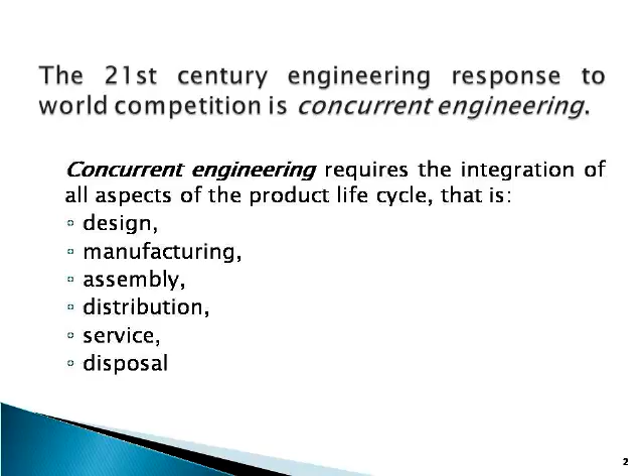The 21st century engineering we are entering in, its response to the world competition is concurrent engineering. Concurrent engineering requires the integration of all aspects of the product life cycle, that is design, manufacturing, assembly, distribution, service, disposal. Two important areas in the life cycle of a product are design and manufacturing. Process planning serves as an integration link between design and manufacturing.

Process planning consists of preparing a set of instructions that describe how to fabricate a part or build an assembly which will satisfy engineering design specifications. So let us now discuss the process planning in detail. It involves describing detailed instructions that one uses to fabricate a part to specifications.

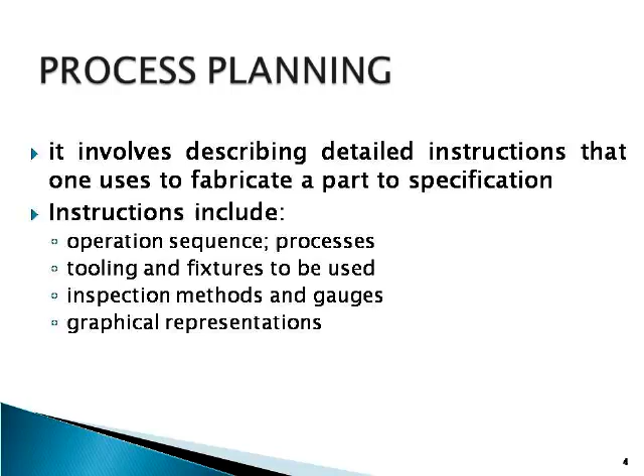The instructions include operation sequences or the processes, the tooling and fixtures to be used, inspection methods to be used, gauges to be used, and the graphical representations, etc. Process planning is an act of preparing a detailed processing documentation for the manufacture of a piece part or an assembly. It is a systematic determination of the methods by which a product is to be manufactured economically and competitively.

These are all various ways that we can discuss the process plan. But we often confuse two words. One is process planning, the other one is production planning. In fact, process planning is entirely different from production planning. I am going to give you those things here.

Process planning is concerned with the engineering and technology issues of how to make the product and its parts, what type of equipment and tooling are to be used to fabricate the parts and assemble the product. Whereas production planning is concerned with the logistics issues of making the product, that is ordering the material, ordering the tools, obtaining the resources required to make the product in sufficient quantities to satisfy demand. It may be noted that production is always done only after the process planning.

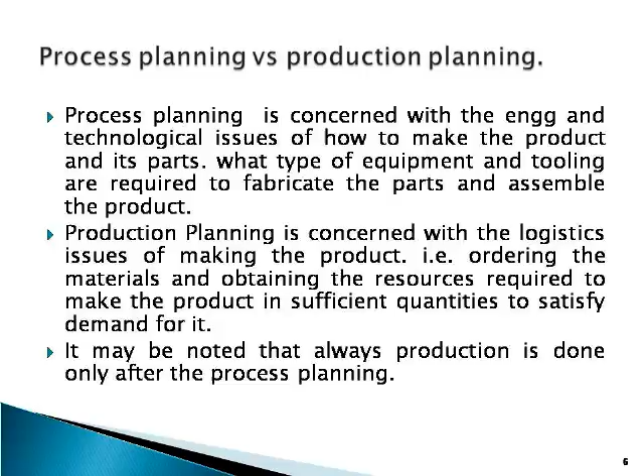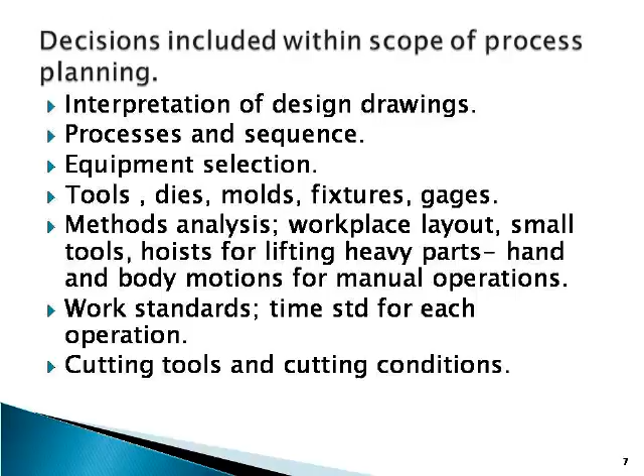There are certain decisions included in the scope of process planning, that is interpretation of design drawings, and the process planner should have the knowledge of processes and sequences, and should have the knowledge of equipment selection and take a decision regarding that. You should have the knowledge of tools, selection of tools, dies, molds, fixtures, gauges, and methods analysis, which includes workplace layout, small tools, hoists for lifting heavy parts, hand and body motions for manual operations, work standards that is time standards for each operation, cutting tools, machining conditions and cutting conditions, etc. You see in this slide, it is simply an operation sheet.

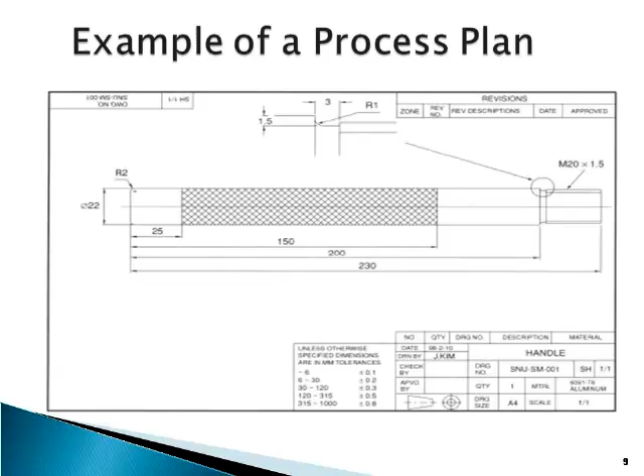So this is another typical process plan sheet being used. This is more or less a standard one, but the format could be different with different manufacturers. These are the typical process plans being used in industry. I'm just showing them for our reference and better understanding.

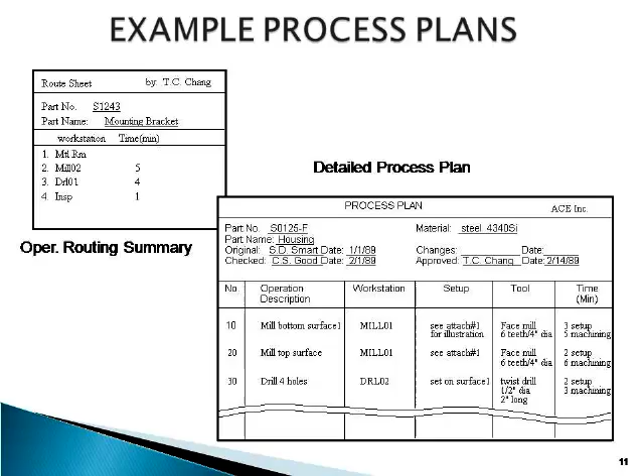If the process planner's productivity is significantly improved - because process planning is an act which is based completely upon the process planner's view, expertise and knowledge - if process planning is done by one process planner, it could be different from another process planner, and his time is very, very important. If he could save his time, he would be able to spare the remaining time on various other aspects in order to improve the productivity.

He can spend more time on methods improvements and cost reduction activities. Routings can be consistently optimized. Manufacturing instructions can be provided in greater detail. Pre-production lead times can be reduced. Responsiveness to engineering changes can be increased.

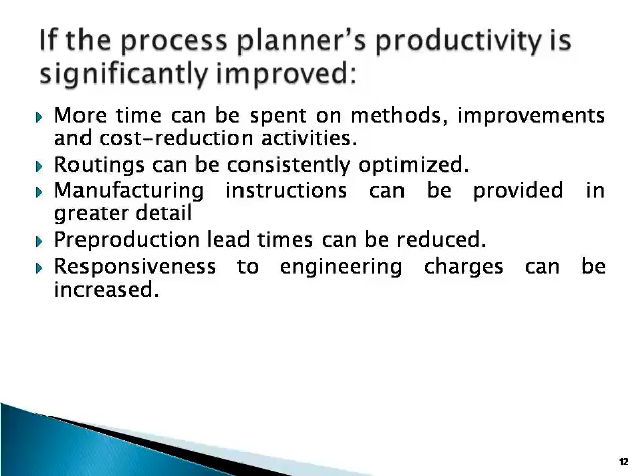And the development of process plans involves a number of activities. First is part print analysis, which is called analysis of part requirements. Selection of the raw work part, that means the basic shape and size of the workpieces. Determining manufacturing options and their sequences. Selection of machine tools, selection of tools, work holding devices, and inspection equipment. Determining machining conditions and manufacturing time.

What is this analysis of part requirements? The part requirements can be defined as part features, process that includes the process determination steps of processes, dimensions - it will take decisions regarding the selection of machine tool size - tolerance specifications, the capability of machine tools can be selected based upon tolerance specifications, and CNC code generation, etc.

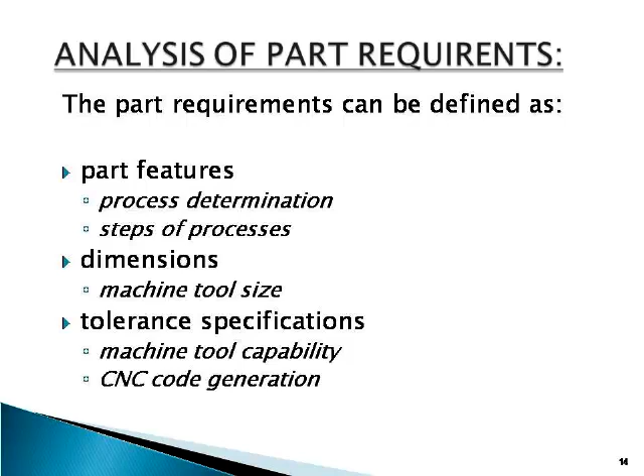And selection of raw workpiece - it involves such attributes as basic shape of the workpiece. You can have standard materials, whether it is a rod, a slab, a blank or a profile, and the dimensions. Sometimes pre-shaped materials - cast parts, forged parts, extruded parts, like that. Size of the workpiece, basic raw material, and size of the machine tool on which this workpiece is capable of being held, and material conditions, tool selections, and other things.

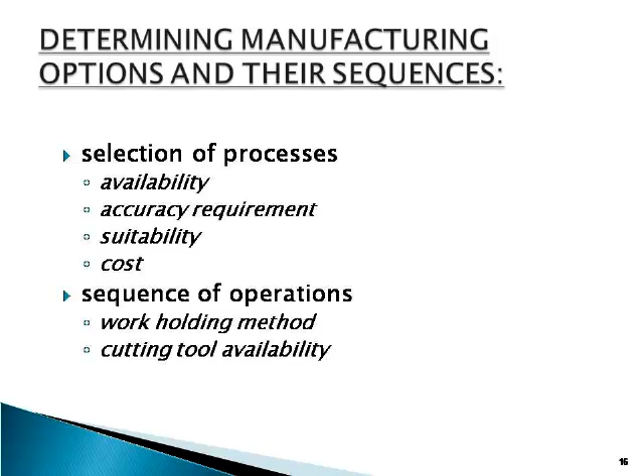Determining manufacturing options and their sequences - selection of the processes based on availability, accuracy requirement, suitability, and cost. Sequence of operations - there are several operations. What operation is to be done first? What operation is to be done next? Work holding methods - how best you can hold the work so that maximum number of processes can be done on the given workpiece without changing the setup.

Cutting tools availability, cost of the cutting tools - you can do the operation with the least cost tools, or you can do the operations with more costlier tools also. So all these things depend upon how the process planner selects it, and a very important thing is selection of machine tools.

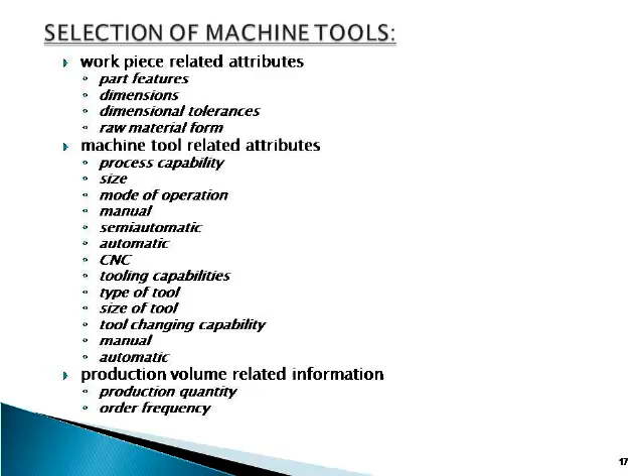For example, reaming cannot be done without drilling, so first a drill must be selected to drill a hole, and then a reamer to ream the hole. If tapping is to be done in the drilled hole, it can only be done after the reaming operation. Drilling, reaming and tapping must be done sequentially. You cannot do the reaming operation first and then drilling next. So this selection of sequence of steps is a process plan.

You take similarly the turning operation. There are several operations that can be done on lathe machines: simple turning, orthogonal cutting, tapering, profile turning, grooving, facing, face grooving, form cutting, boring, drilling, and several others like parting, threading, knurling. All these operations can be done on lathe machines. So you have to select the machine, select the process, and select the tool also for that operation.

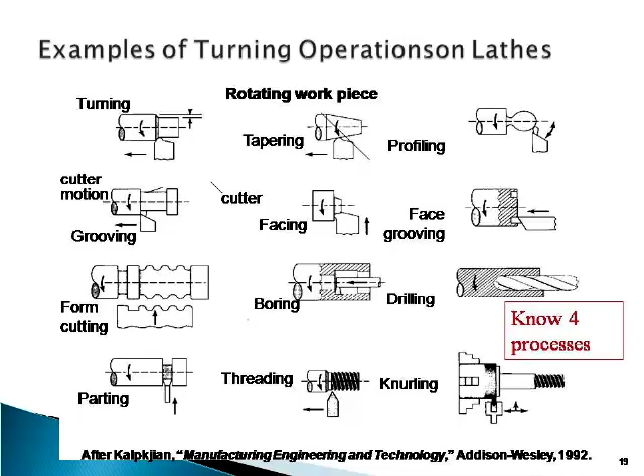Sometimes several lathe machines are available, and the right lathe machine must be selected through evaluation of machine tool alternatives. This can be done by machine tool capability, also called process capability. Process capability has to be evaluated for all the machine tools available on the shop floor.

Machine tool capability or process capability can be determined by statistical tests. After machining several components, say 100 or 200, in the same universe of discourse, you take the mean size and the deviations, plot them as a normal graph, and observe the deviations at plus or minus 3 sigma levels. Accordingly you calculate sigma, called standard deviation, as the square root of sigma of (x minus x bar) squared divided by n minus 1, where n is sample size, or sigma equals R by d2.

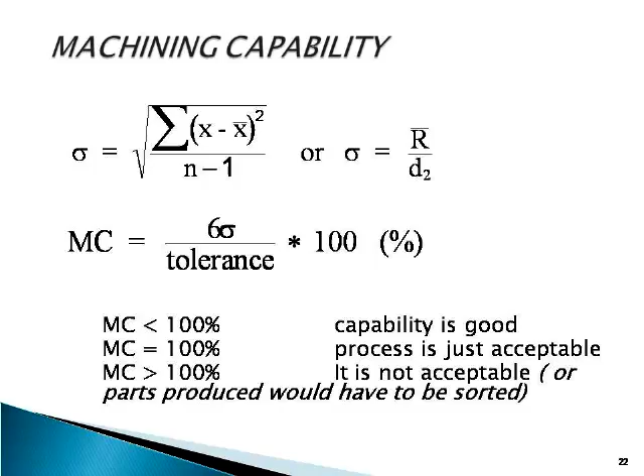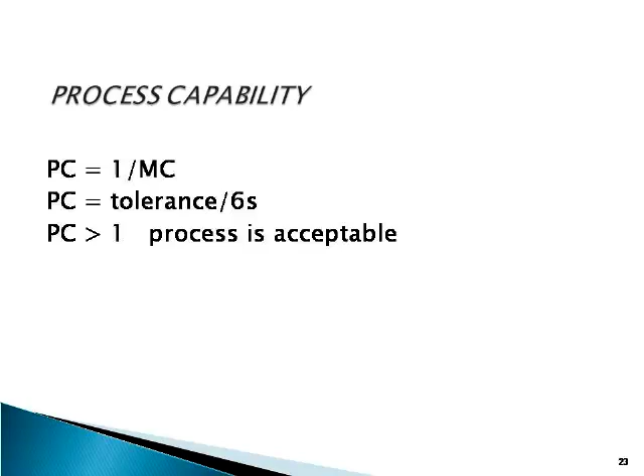Machine capability can be calculated as 6 sigma divided by tolerance, multiplied by 100 for percentage. Machine capability less than 100 means the capability is good; more than 100% is not acceptable. So you must select the machine tool which is acceptable. Machine tool capability and process capability are inverse parameters: process capability equals 1 divided by machine tool capability, or tolerance divided by 6 sigma. Process capability more than 1 means the process is acceptable, and if you have a choice of machine tools, you should select the one with higher process capability.

Sometimes you can also select a machine tool based on the unit cost of product. This is again a statistical test only. The distribution and size of finished parts are assumed to be normal. It can be determined only by conducting statistical tests, and the results are available on the shop floor; the process planner should have these details before starting the process planning activity.

So they know the process capabilities and the cost of the part produced on a specific machine tool. Here, ZU and ZL are the standard normal variates for upper and lower tolerance limits. TU and TL are the upper and lower tolerance limits. Mu is the mean of the population, sigma is the standard deviation. The portion of acceptable parts, AP, can be calculated as phi of Z of U minus phi of Z of L.

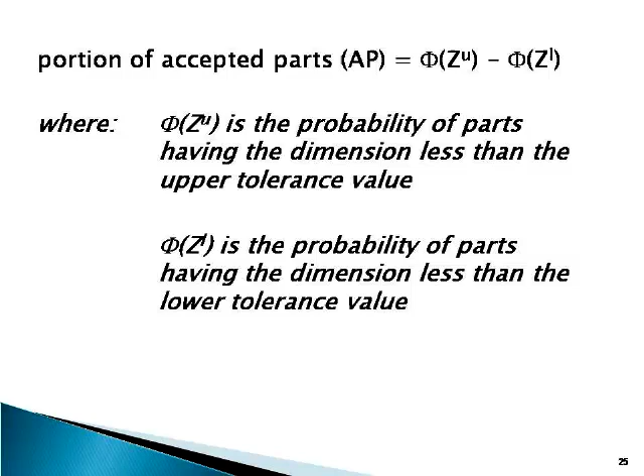Phi of z of u is the probability of parts having dimension less than the upper tolerance value, and phi of z of l is the probability of parts having dimension less than the lower tolerance value. So this is a typical process capability study, showing how to calculate the portion of acceptable parts. This data is already available and is very much required for the process planner.

Then the selection of tools, work holding devices, and inspection equipment. Tools must be selected based upon tool material, shape, size, nose radius, and tolerances. If it is a single point tool, we also have to select the tool parameters, because the tool signature or nomenclature required for processing one kind of tool material could be quite different from another. For example, if you drill a hole in brass or copper, the point angle is sharp compared to drilling a steel plate. So the tool parameters, signatures, or nomenclatures could be different depending upon the workpiece and the machining process selected.

Work holding devices: the primary purpose of a work holding device is to position the workpiece accurately and hold it securely. Manually operated devices include collets, chucks, mandrels, and faceplates. Designed devices include power chucks and specially designed fixtures and jigs. Flexible fixtures are used in flexible manufacturing systems, like pallets and other things.

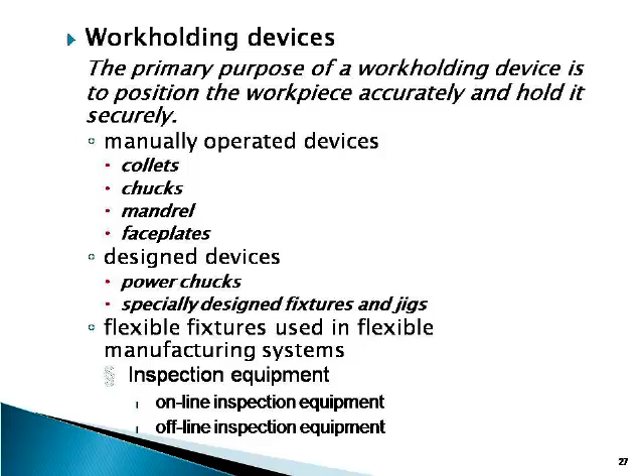Inspection equipment includes online inspection equipment and offline inspection equipment. The planner also selects the cutting conditions and manufacturing times, that is, machining conditions. Machining conditions include what cutting speed, cutting feed, and depth of cut you will select for a typical operation.

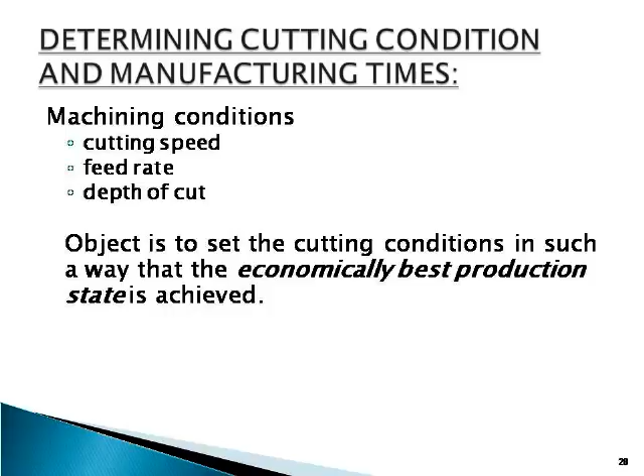The object is to set the cutting conditions such that the economically best production state is achieved. That means the cost of machining must be less, and the quality of the product must be very good. What is the economically best production state? It is either minimum production cost or maximum production rate. Both indicate the same thing. Sometimes you have to choose the feed as low feed or high feed.

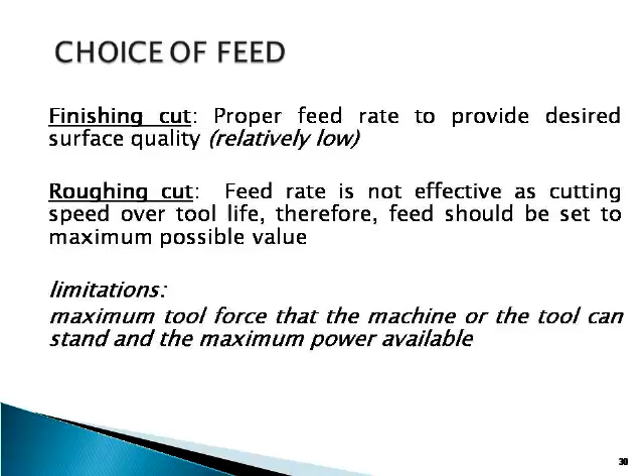Low feed is for a finishing cut, and high feed is normally used for a roughing cut operation, so you go for high feed. High feed gives you more productivity, more metal removal, and thereby more production rate. Feed rate is not as effective as cutting speed on tool life, so feed should be set to the maximum possible value. This is called the golden thumb rule of metal cutting: you must choose as high a feed as possible in a roughing operation. Limitations are the maximum tool force that the machine or tool can stand, and the maximum power available.

Choice of cutting speeds: you can select high speed or low speed. High speed gives low tool life, high tool cost, high production rate, and shorter production time. Low speed gives high tool life, low tool cost, low production rate, and long production time.

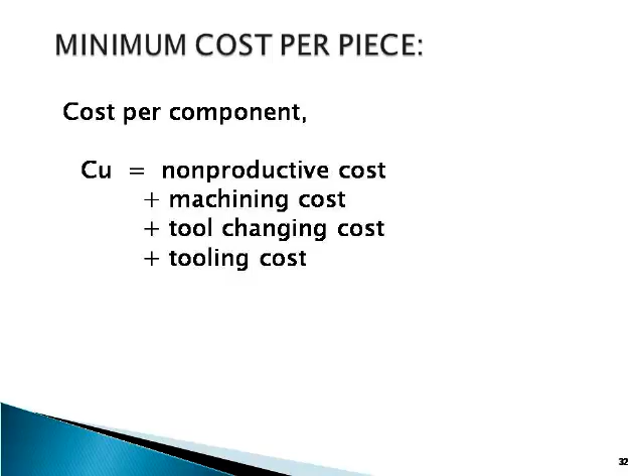Sometimes you can also calculate minimum cost per piece. Minimum cost per piece can be calculated as the sum of the non-productive cost plus machining cost plus tool changing cost plus tooling cost. This is a popular equation available in any metal cutting textbook, particularly in 'Metal Cutting Principles' by Boothroyd, who has discussed all these things in detail.

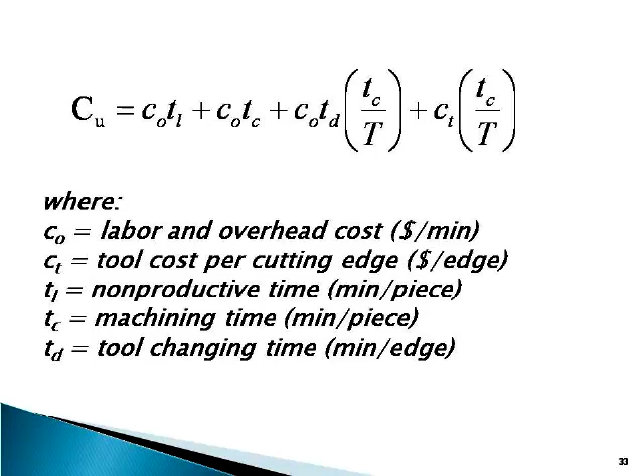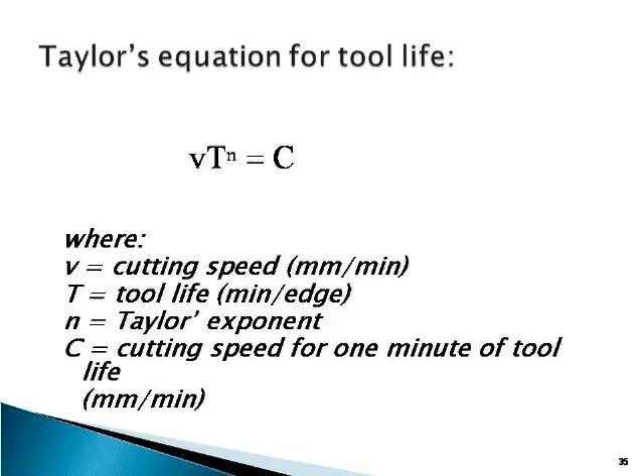Cu is equal to C naught Tl plus C naught Tc plus Co Td Tc by T plus Ct Tc by T, where the other parameters are given here. We can calculate the total cost of the component using this. For a single pass turning operation, Tc is equal to pi Ld by Vf. We know Taylor's equation for tool life: V T power n is equal to C, where V is cutting speed, T is tool life, n is the exponent, and C is the cutting speed for one minute of tool life.

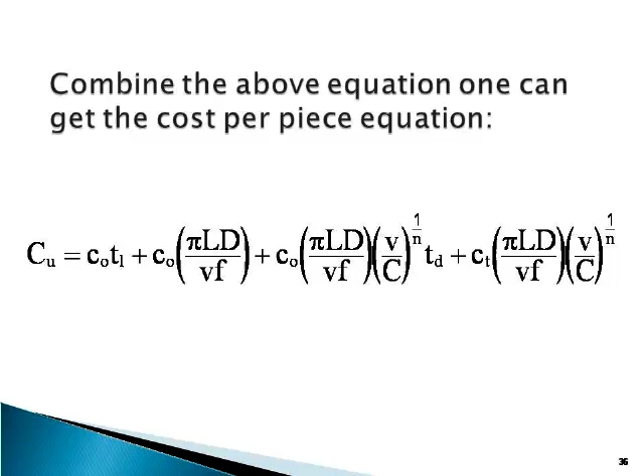Combining the above equations, one can get the cost per piece equation. This equation can be further optimized. Differentiating this equation with respect to cutting speed, equating it to zero, and solving for cutting speed gives the cutting speed for minimum production cost.

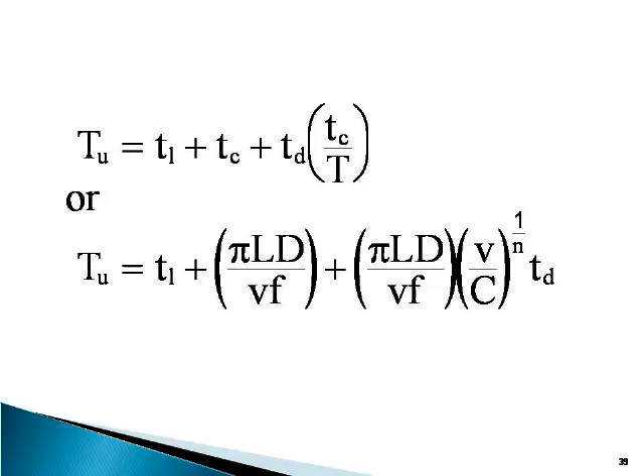Similarly, for maximum production rate, TU is equal to non-productive time plus machining time plus tool changing time, and TU can be calculated by this equation. Again, differentiating TU with respect to V and equating it to zero, then solving for V, gives the cutting speed for maximum production rate. Afterwards, manufacturing lead time can be calculated as lead time equals S plus TU, multiplied by Q.

Q is lot size, TU is equal to production time per piece, and S is equal to major setup time. If you know these things, we can calculate these machining parameters, and you can select the cutting speeds, you can select the cutting feeds, and accordingly lead time also can be calculated.

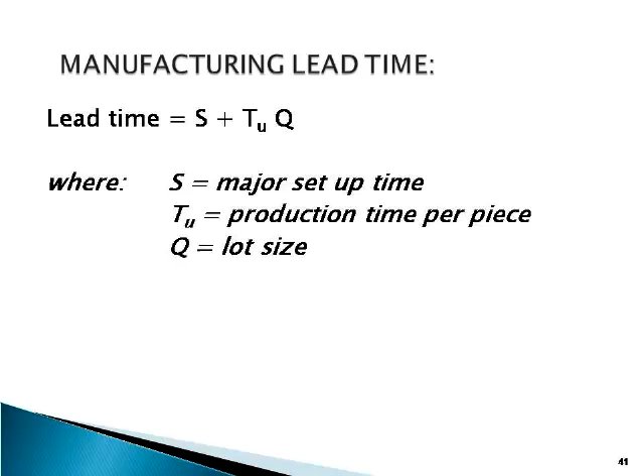Here is a small example given to get much more clarity of the topic. A lot of 500 units of steel rods of 30 centimeters long and 6 centimeters in diameter is turned on a lathe machine at a feed rate of 0.2 mm per revolution, and depth of cut is 1 mm. The tool life is given by this equation.

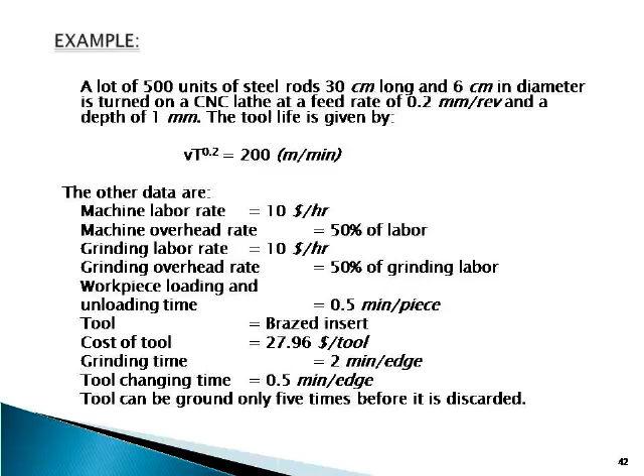The other relevant data has been given here, and we were asked to determine optimum tool life and optimum cutting speed to minimize the cost, optimum tool life and optimum cutting speed to maximize the production rate, minimum cost per component, time per component and corresponding lead time, maximum production rate, corresponding cost per component and lead time.

You can calculate the relevant parameters given in the previous equations using the values given in this problem. As C0 you can calculate it, and we got it as $0.25 per minute.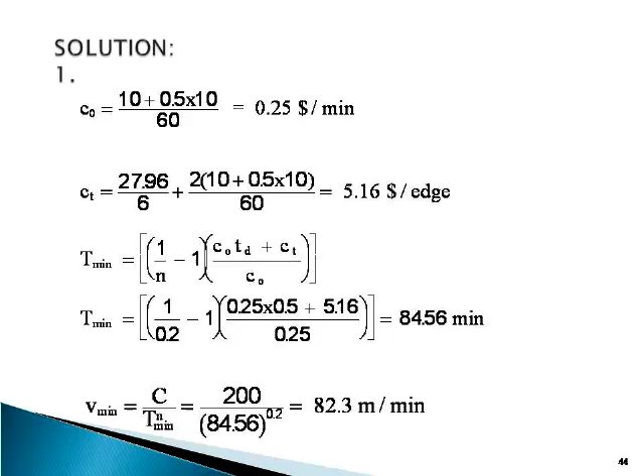CT is equal to $5.16 per edge, and T minimum we got it as 84.56 minutes, and V minimum we got it as 82.3 meters per minute, and T maximum is 2 minutes, and V maximum is 174.1 meters per minute.

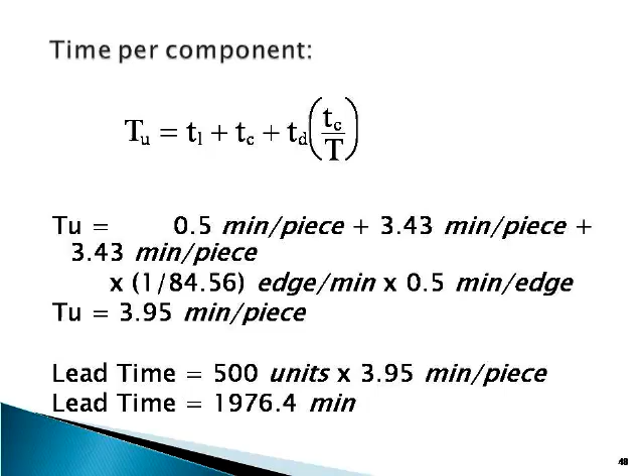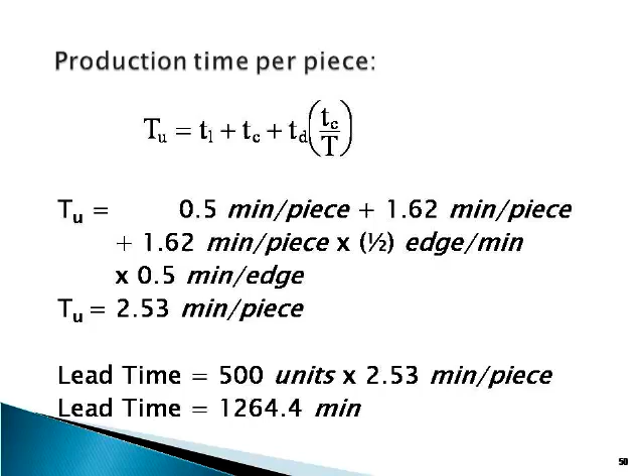Minimum cost TC is equal to $3.4 per piece, and CU is we got it as $1.2 per piece, and time per component can also be calculated. Maximum production rate is calculated as 1.62 minutes per piece, and production time per piece is calculated, and cost for maximum production rate is calculated as $4.82 per piece.

After this example, we can easily conclude that we can select the speeds and feeds based upon what we want. Suppose we wanted higher feeds, the cost of production is to be minimized, the speeds and feeds are selected accordingly. If we wanted maximum production rate, the speeds and feeds are to be selected differently, and tools are selected differently. So based upon this machining knowledge, the process planner should select the optimum speeds and feeds and depth of cuts based upon the tool and workpiece combinations.

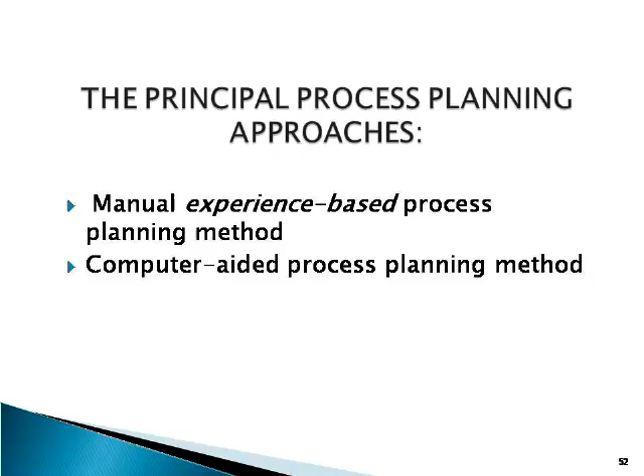Now, what are the various process planning approaches that are normally adopted here? One which is being adopted anciently is manual or experience-based process planning method. Even today, it is popularly used. Second one is computer-aided process planning method. Let us discuss these things.

Manual method or experience-based process planning method. This method is most widely used, but it's time consuming because it completely depends upon the human planner and his knowledge and experience, and it leads to inconsistent plans.

Today, if I am the process planner doing the process planning activity, it would be like something, and if I do it after a few days, I could create another process plan. Both process plans are correct in all aspects. If you adopt this process plan or that process plan, both give you the best component. But the sequence of steps and other things followed in one plan could be different from the other plan.

So there's inconsistency in these activities. This can result in only one kind of process plan if the part is simple. If the part is complex, meaning many machining features are on the part, the complexity increases. And if the part is complex enough, we may have to have more than one process plan generated. That's why in manually experience-based process planning system, there will be inconsistency in plans.

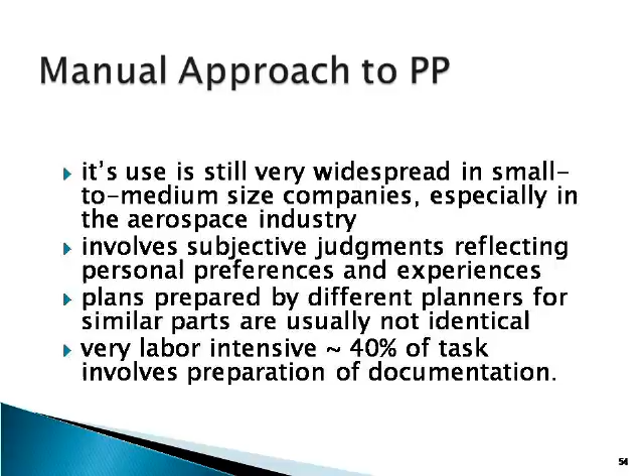It is very labor intensive, like 40% of the task involves preparation of documentation. Process planning activities in a schematic way are: analyze the part requirements, determine operation sequence, select the equipment, and calculate processing time. This is an iterative procedure.

Calculate processing time. If this is more or less, again select new equipment, like that, and decide the equipment, then document the process plan and communicate the process plan to the shop floor people.

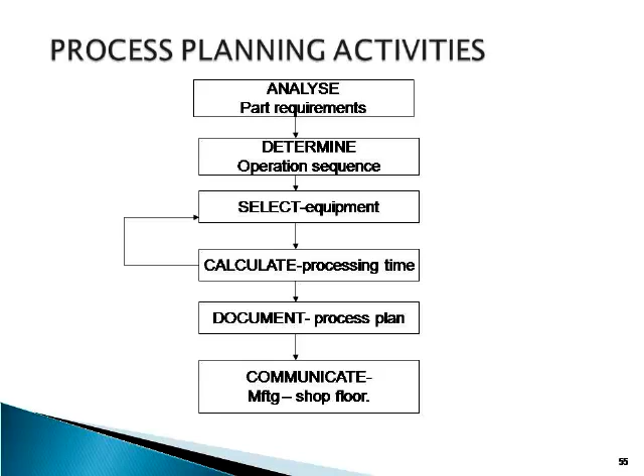Factors affecting the process planning activity are: volume of production, the skills and expertise of manpower, delivery dates, the schedules, material specifications, accuracy and process capabilities of machines, and accuracy requirements of parts and products.

Because of these variations, we need to go for automating the process planning activity. Can we do the process planning activity computerized or computer augmented? Yes, it is required to develop computer aided process planning or automatic process planning in order to have consistency in process plans, reduce redundancy, and reduce the time of preparation of process plans.

Particularly in the age of computer integrated manufacturing, we don't have any other option except computer aided process planning, in order to link the computer aided design and computer aided manufacturing departments. Process planning provides the link between CAD and CAM. The process planning function converts engineering designs into fabrication instructions. Thus, automated process planning is key to integrate CAD/CAM.

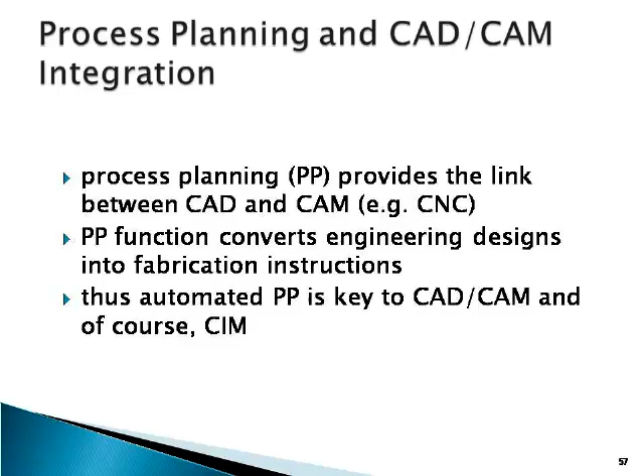Of course, computer integrated manufacturing. Without automated process planning, CIM would be impossible. Both group technology and computer aided process planning are two essential elements of CAD/CAM integration. We already discussed group technology, which provides a basis and methodology for design and manufacturing communications, whereas automated process planning provides a means to facilitate this common communication and remove the wall between design and manufacturing.

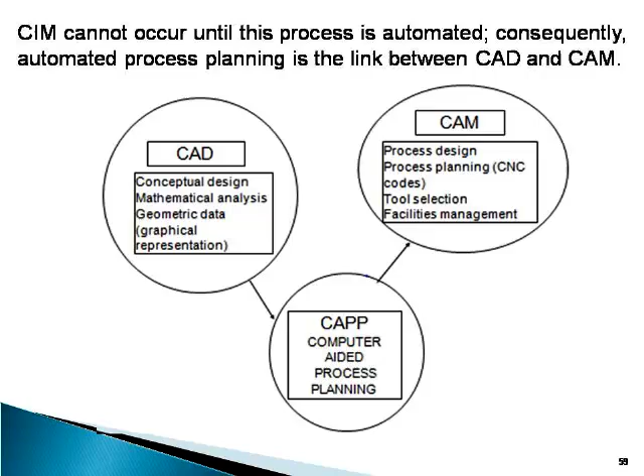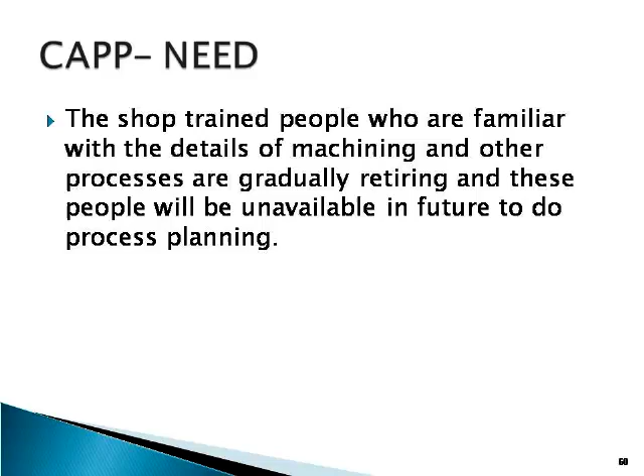The need for CAPP arises because shop trained people familiar with the details of machining and other processes are gradually retiring. The experienced process planners are gradually retiring, and there is a tremendous gap. Knowledgeable people are not there much, and depending on them is also very difficult, along with several other options as we have discussed already. We have to go for automated process planning because of this need.

There are certain potential benefits of automated process planning, which include a 50% increase in process planning productivity, 40% increase in capacity of existing equipment, 25% reduction in setup costs, 12% reduction in tooling, 10% reduction in scrap and rework, 10% reduction in shop floor labor, 6% reduction in work in process, and 4% reduction in materials.

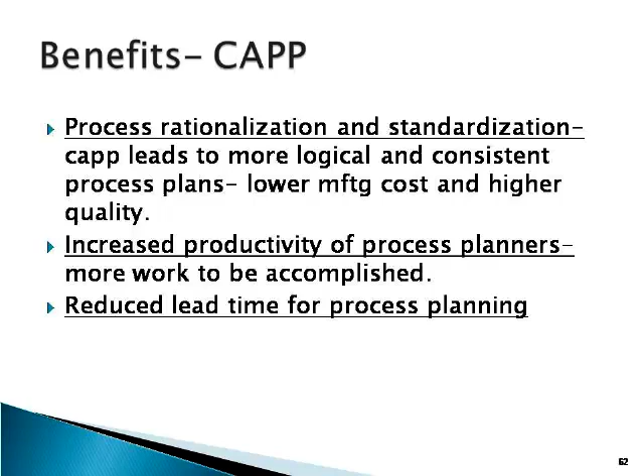Other benefits include process rationalization and standardization. CAPP leads to more logical and consistent process plans, lower manufacturing cost, and higher quality. It increases productivity of process planners, allowing more work to be accomplished, and reduces lead time for process planning. It also improves legibility, as computer prepared route sheets are neater and easier to read, and allows incorporation of other application programs, since CAPP can be interfaced with cost estimation and work standards.

In a typical industrial situation, how is the process planning activity done? Let us say computer-aided process planning activity is done. This is the CAD, and for this the design is this. This design information is available here. And using this design information, in order to manufacture this component, we need to write a generator, a CNC part program. This is the cutter path. Part code needs to be generated, and it can be done by human beings or it can be done by CNC if you prepare a CNC program.

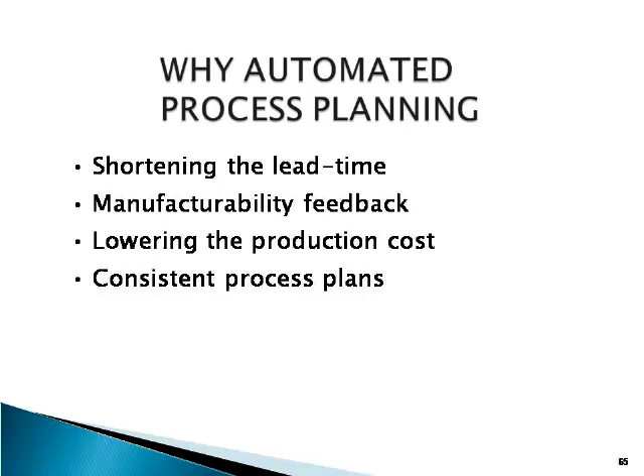How to do CAPP, computer-aided process planning, how to achieve it? There are two varieties, two approaches. One is called retrieval or variant computer-aided process planning system. The other is called generative computer-aided process planning system. Sometimes the two systems combine and are known as semi-generative computer-aided process planning.

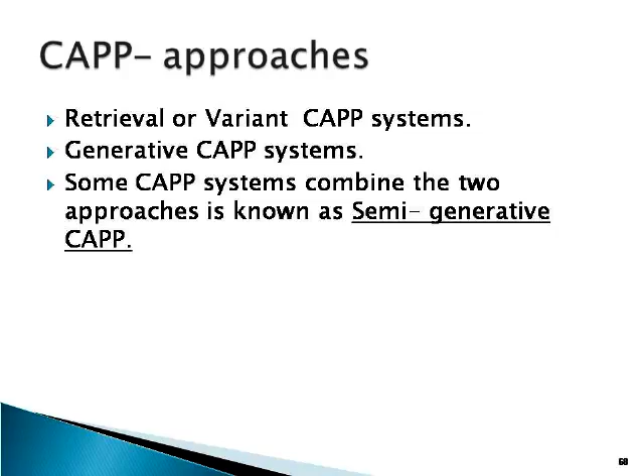Let us see what is this variant process planning approach. This variant process planning approach is a group technology based approach, dependent on good data mining and search engines. A variant CAPP system requires a database containing standard process plans. A standard process plan is stored in computer files for each part code. The standards are based on current part routings in use in the factory, or an ideal plan prepared for each family. The system has provisions for editing a particular standard plan to accommodate product variation.

In the variant CAPP method, process planning is developed for a master part or composite part, which represents the common features of a given part family. Master part is one which has the common features of a family of parts. Suppose you have several parts of a family; the master component has all the features of these parts. So if a master component has got one feature, that feature must be present in one of the parts of that particular family.

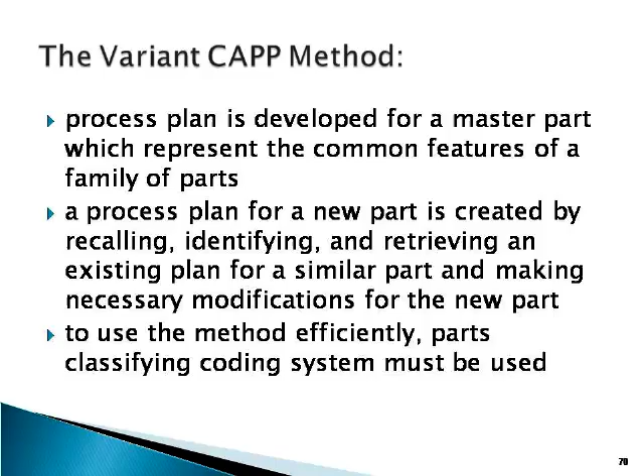A process plan for a new part is created by recalling or identifying and retrieving an existing plan. Just by doing some editing operations on the existing process plan, we can generate the process plan for the new part, make certain modifications, and again store the new part process plan against the GT code. To use this method...

If the plan exists with the same GT code, retrieve that, or retrieve the nearest code, meaning the nearest part process plan is retrieved. Then do the editing operation: edit the existing plan or write a new plan, which is easy since only a few features are different. Edit the process plan, develop a new one, put it in order, and prepare the process plan format for other application programs.

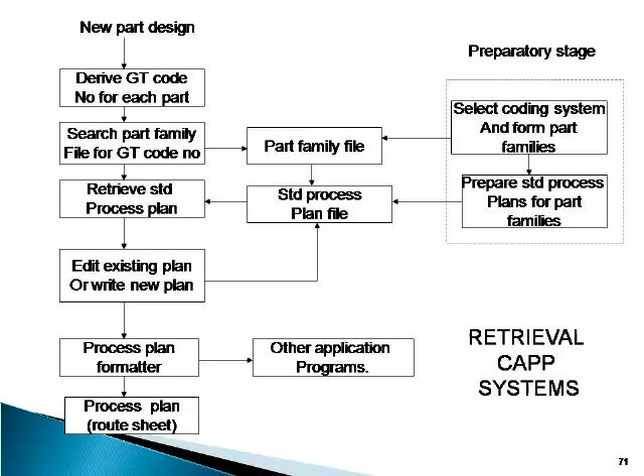In order to develop the process plan for a new part, you need these preparatory stages: for the CAPP system, assign GT code to form part families and create standard process plans for this family, storing them in a database. Then the process planner codes and classifies the new part into a family and retrieves the standard plans.

The data files required and the steps in the preparatory phase are: selecting the appropriate classification and coding system for the company, forming part families for the parts produced by the company, and preparing standard process plans. You have to repeat steps 2 and 3 as new parts are designed and added to the company's database - this gives the capacity to alter an existing process plan.

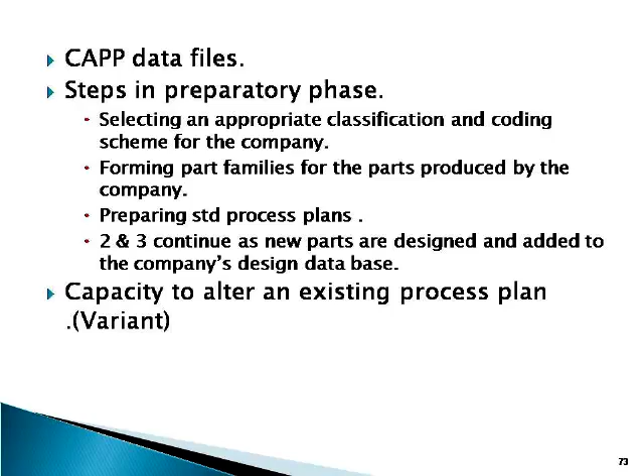You can see this table containing different variant process planning systems available in the literature, some of which are also available commercially: CUTPLAN, CAPP, COMCAPP, DCLASS, IntelliCAPP, MAYCAPP. These are the systems, the companies that developed them, and the decision logic functions they are based on, as given in this slide.

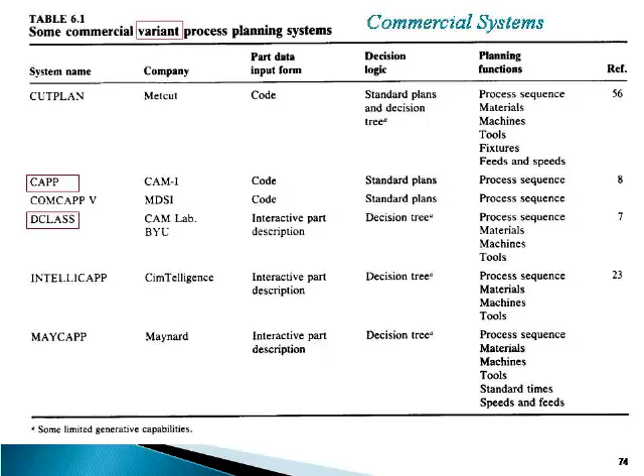This slide is self-explanatory. Let us discuss the advantages of the retrieval CAPP system. Once the standard plan has been written, a variety of parts can be planned. Comparatively simple programming and installation is required to implement the planning system. It allows efficient processing and evaluation of complicated activities and decisions, thus reducing time and labor requirements, and standardized procedures by structuring the manufacturing knowledge of process planners to company needs.

Lower development and hardware costs, shorter development times. Efficient processing and evaluation of complicated activities and decisions, thus reducing time and labor requirements. Standardized procedures by structuring manufacturing knowledge of the process planners to the company's needs. Lower development and hardware costs, shorter development times.

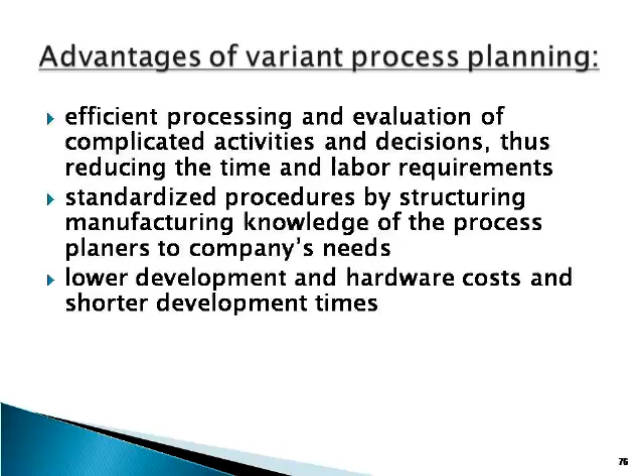Now, disadvantages of the variant process planning system: maintaining consistency in editing is difficult. It is difficult to adequately accommodate various combinations of material, geometry, size, precision, quality, alternate process sequences, machine loading, etc. The quality of the final process plan generated depends, to a large extent, on the knowledge and experience of the process planner.

The system is understandable. The planner has control of the final plan. It is easy to learn and easy to use.

Drawbacks are: the components to be planned are limited to similar components previously planned. Maintaining consistency in editing is difficult. Experienced process planners are still required to modify the standard plan for a specific component.

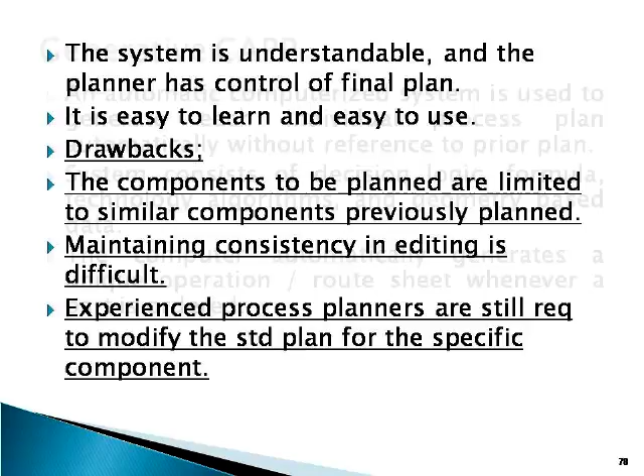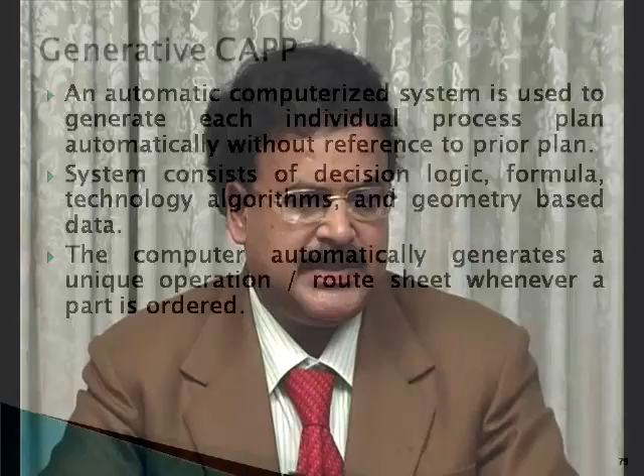Now let us discuss the generative computer-aided process planning system. It is an automated computerized system used to generate each individual process plan automatically, without reference to any prior plan.

It does not take the database of the process plans and edit them like variants. Any part for which you need to develop the process plan starts from scratch. So process planning is done automatically without reference to a prior plan.

The system consists of decision logic, formulas, technological algorithms, and geometry-based data. The computer automatically generates a unique operation and route sheet whenever a part is ordered. Instead of retrieving and editing an existing plan contained in a computer database, it creates the process plan based on logical procedure.

The process sequence is planned without human assistance and without a set of predefined standard plans. Expert systems and artificial intelligence algorithms have been used to develop generative process plans. An expert system is a computer program capable of solving complex problems that normally require a human with years of education and experience. The first ingredient is the technical knowledge of manufacturing and the logic used by successful process planners, which must be captured and coded into a computer program.

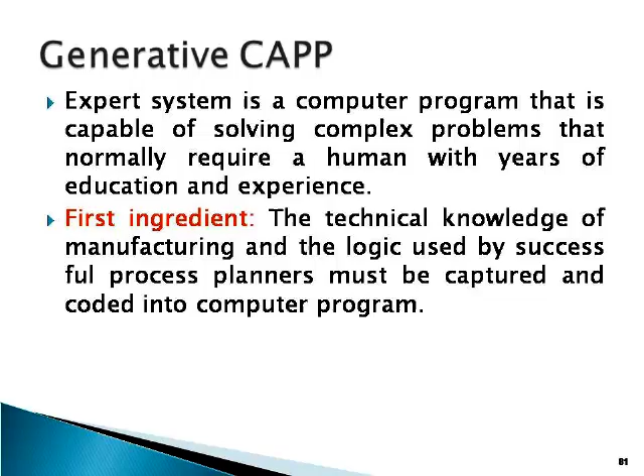The knowledge and logic of a human process planner form the knowledge base that is developed. The generative system then uses that knowledge base to solve process planning problems.

The second ingredient for generative CAPP is a computer-compatible description of the part to be produced. Pertinent data and information are needed for the plan. The process sequence has two ways: a geometrical model like CAD, or GT code.

The third ingredient is the capability to apply the process knowledge and planning logic contained in the knowledge base to a given part description. CAPP uses its knowledge base to solve the specific problem of planning the process for a new part, like an inference engine. By using the knowledge base and inference engine, it synthesizes a new process plan from scratch for each new part presented.

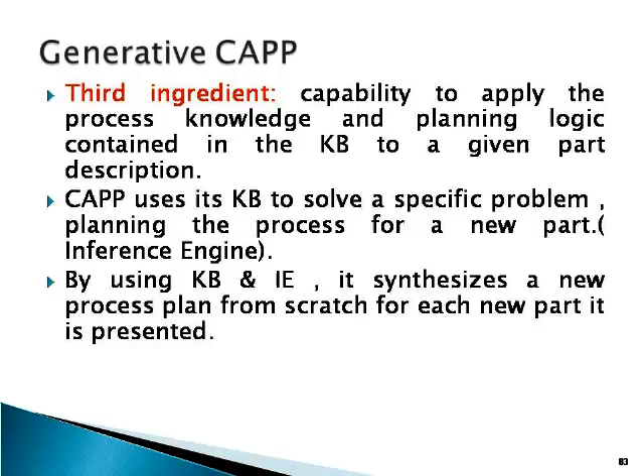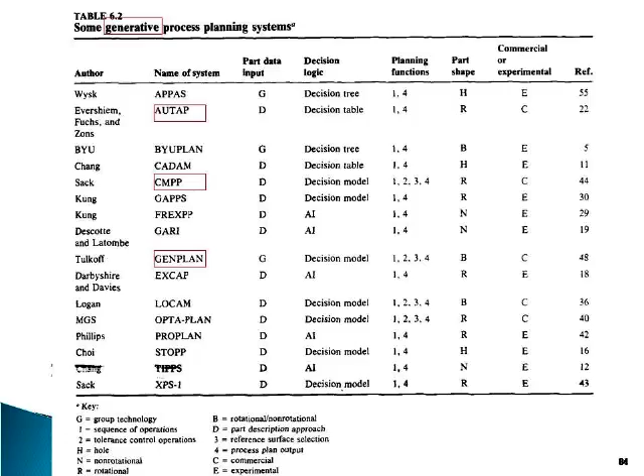The details have been given for all commercial systems, and this table gives only information about the availability of generative process planning attempts or systems limited to certain types of parts, such as rotational parts and hole-making operations.

But there is no unique generative process planning system developed so far which can address the problems of prismatic parts as well as rotational parts. However, the study on generative process planning is still continuing.

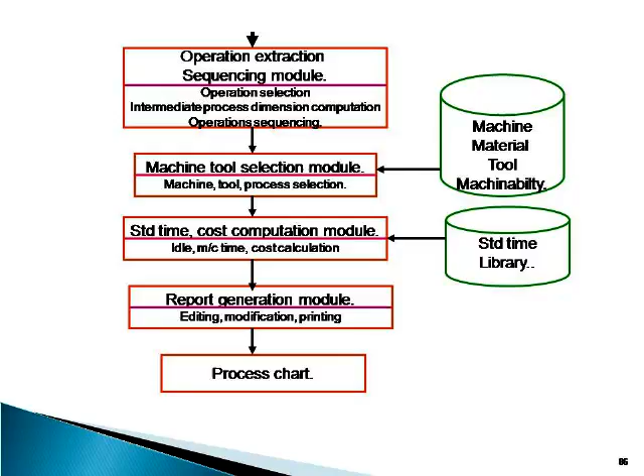A report generator. Let us discuss the generative CAPP system in the form of steps. The first step is to input engineering specifications into the CAPP system—that is, part features which can be given like geometrical features, tolerances, sizes, locations, etc. Sometimes this coded information is stored as raw data in the computer.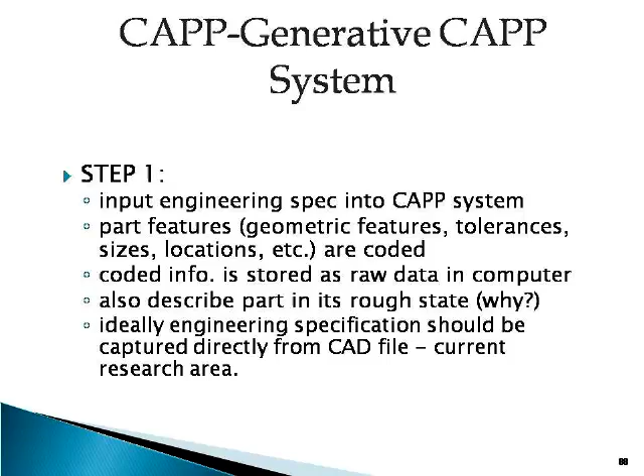Also describe the part in its rough state, which should be given as input. Ideally, engineering specifications should be captured directly from the CAD file, and current research is also that the CAD file is given as direct input to the CAPP module. The input may be in the form of .dxf files, PDES files, or STEP files, and this information is given as input to the CAPP module.

Step 2: generate programs to transform coded data and textual information into a detailed process plan. Whatever coded or textual information exists is converted and a process plan is generated. This requires complex algorithms and large databases to accomplish, including algorithms for sequence prioritization, process selection, and machine tool selection.

There will be integration with databases. It works by reading the input file and understanding it, selecting the features, selecting the machining process suitable to the features, prioritizing the machining process, selecting machine tools for each process, machine tool type and number from the database, and selection of speeds, feeds, and tools to machine the features. All of these are selected, listed, and printed in the form of a process plan.

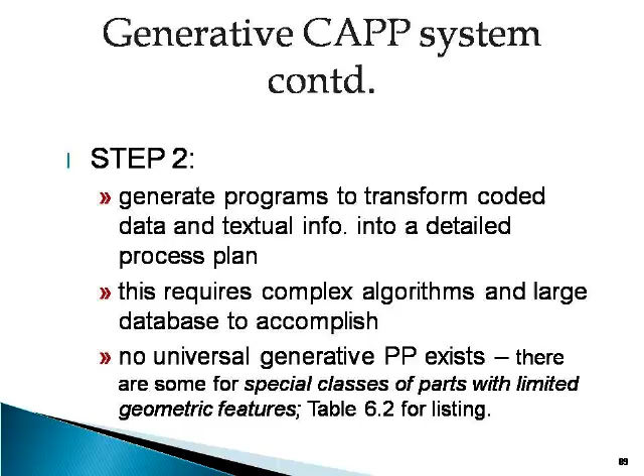No universal generative process plan exists. There are only some for special classes of parts with limited geometrical features.

I would like to give an example process plan system called Computer Managed Process Planning, CMPP, which was developed at United Technologies Research Center. It is commercially capable of automatically making process plan decisions with interactive capabilities, which facilitate the user to examine and modify a process plan as it is developed. It was developed specifically for machined cylindrical parts.

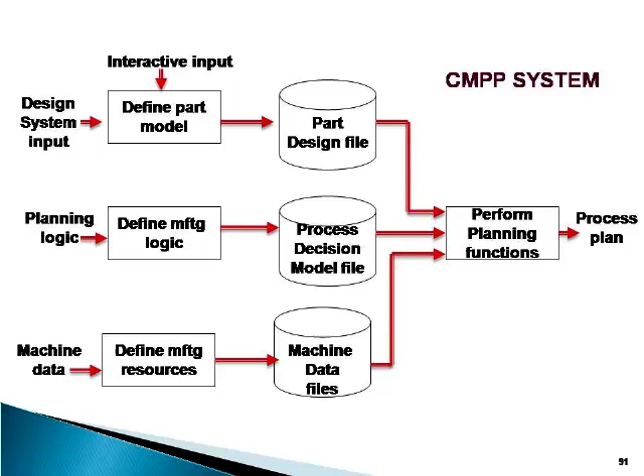The CMPP system works like this: interactive input, design system input, define part model, and a part design file is created. A process decision model file is created using planning logic and defined manufacturing logic. Machine data and defined manufacturing resources create the machine data file, and these perform planning functions. All of this is given as input to another subsystem that performs planning functions to generate the process plan.

First, the databases contain specific information about available machine tools, stock removal allowances for cutting materials, types of cuts, tolerance, and machinability for process decisions. The process decision module must be developed, along with manufacturing logic and resources for a particular firm.

PDM technique is used to define local manufacturing rules. Rules defined by the use of COPPL, computer process planning language, can be used. It requires raw material, geometry, dimensions, final part shape, tolerances, surface finish, geometric form conditions, material specification, and surface treatment.

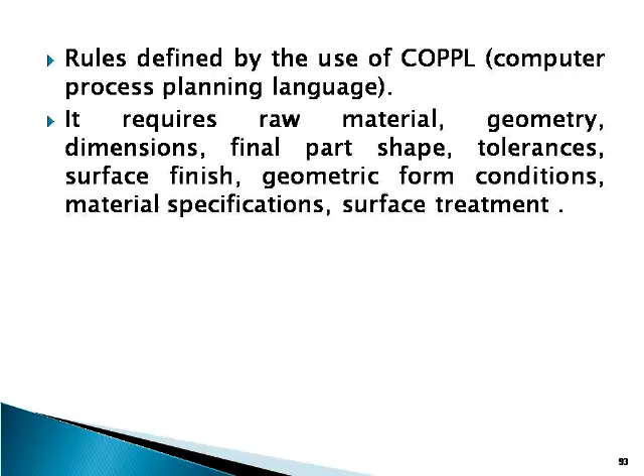CMPP process planning functions are shown in this schematic, in which the sequence of operations is first generated from the part design data, then reference surfaces are determined, dimension tolerances and machine tool data are calculated, and process plan documents are produced.

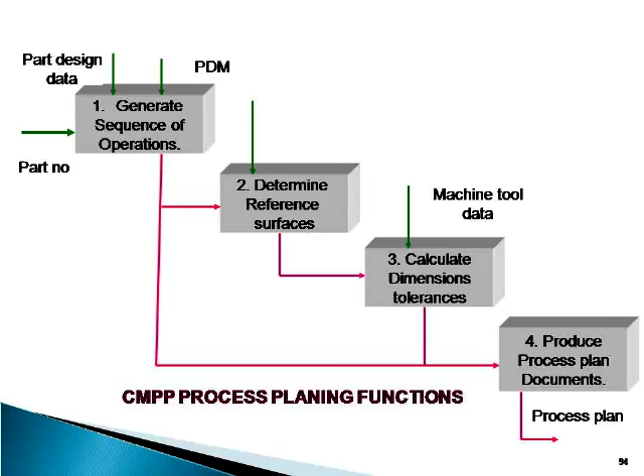For each operation, the operation number, description, type of machine, orientation of the workpiece on the machine, surfaces cut, and heat treatment are given. Dimensioning reference surfaces for each cut in each operation are defined, and machining dimensions, tolerances, and stock removal for each surface cut in each operation are provided.

A printed summary of operations, a printed tolerance analysis, and dimensioned workpiece sketches for each machining operation are available.

Now let us compare the two methods we have discussed so far: variant process planning systems and generative process planning systems. With respect to coding, generative systems require very detailed computer programming, whereas variant systems have complicated part geometry. If you have a huge number of part families, or a complicated composite part, then variant is better. With respect to part geometry, variant is complicated, whereas generative is simple.

Similarity between the family of components is very high in variant systems, since the part is retrieved from part families. If it is dissimilar, variant will fail, whereas generative is best suited for dissimilarity of the component, meaning it generates the process plan from scratch for any component, any time. So similarity between the family of components is very low for generative systems.

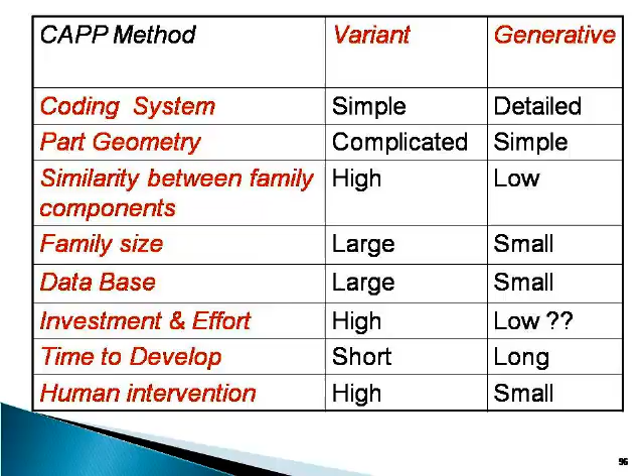Now let us discuss how to select a CAPP system. The first point is classification and coding capability, and its ability to change part attributes, if you have process planning retrieval capabilities, would be very high. The second one is graphics capabilities, CAD database management - if it is based upon that, you can select either one of these methods.

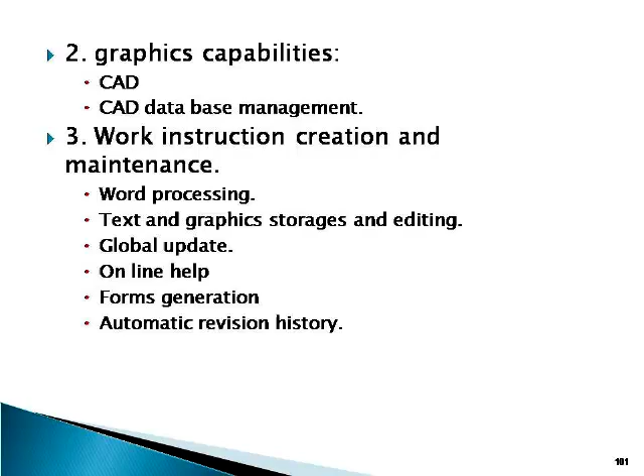The third one is work instructions creation and maintenance, like word processing, text information, graphic storage, editing, global update, online help, form generation, automatic revision history, and process planning capabilities - variant, generative, hybrid, or part family identification, capture knowledge of process parameters, selection of tools, time standard capabilities, calculation of standards, access to other vendors' standard time modules, and machining parameters, selection of speed, feed, determination of stock removal. These are all the parameters that you select for the process plan.

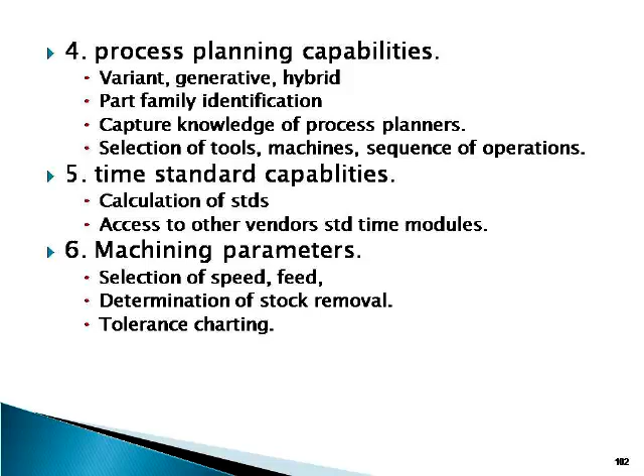And total system considerations like hardware requirement, database management capabilities, interface to other software systems, MRP, system cost, ease of use, future enhancement, and vendor specifications.

Selecting a CAPP system means defining the objectives for the CAPP system, capturing manufacturing expertise and making it available plant-wide, reducing manual input in process planning, facilitating integration of CAD and CAM, and developing optimum and consistent process plans.

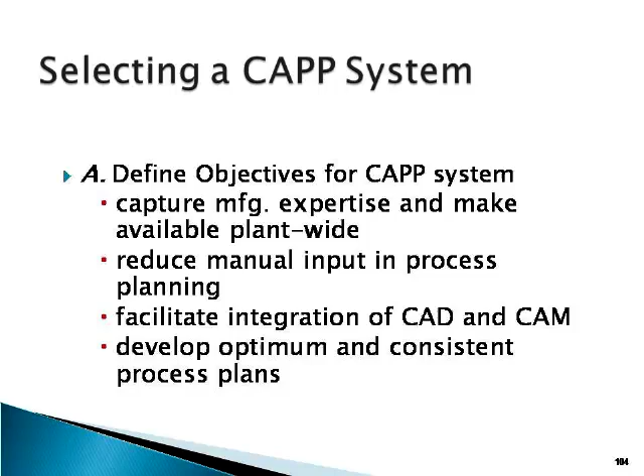Specify criteria of the CAPP system - classification, coding capabilities, graphic capabilities, process planning features, work instructions, time standards, and other things. Based on this information, we can select the available process planning system.

You can represent the product representation as geometrical information - part shape, design features - technological information, tolerancing, surface quality, special manufacturing notes, feature information, and manufacturing features.

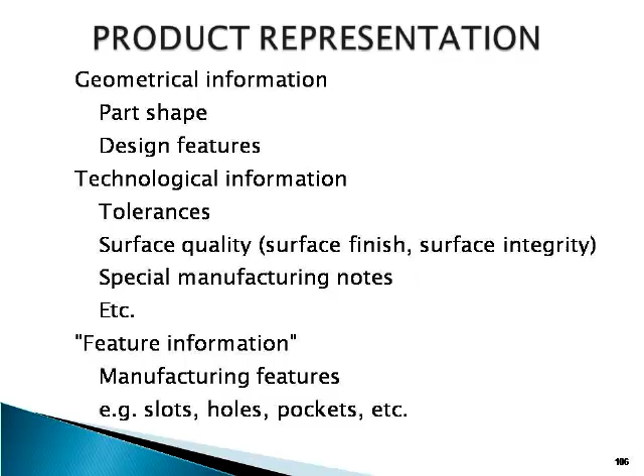And this knowledge of the entire process can be presented in the form of predicate logics and production rules, semantic nets, frames, object-oriented programming. All these things are used in CAPP system programming, and we need to do a lot of discussion in order to understand that. So I'm not going deep into these logic rules and other things, how to develop the process plan. We have only discussed what are the various process plans, but not how to develop the process plan.

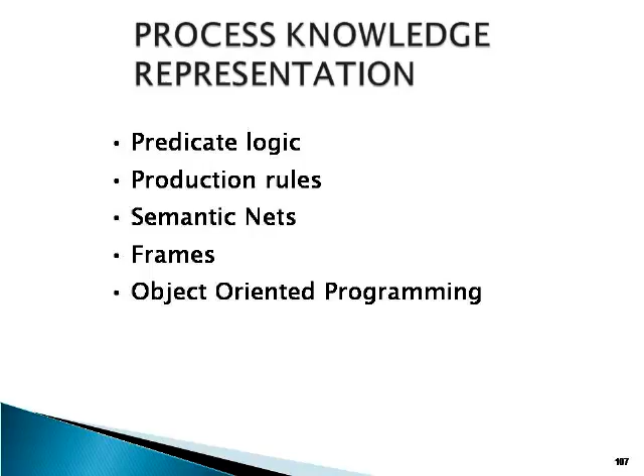Till today, we did not have a unique CAPP system that can address all sorts of computer-related problems. But today we have highly automated systems with a lot of intelligent and decision-making algorithms imbibed in these systems. They can retrieve certain attributes which can be taken into decision logics, and the decision-making algorithms are available. With all that, some of the systems give process planning as an output.

But then a lot of research is still needed to be done, and whatever is achieved is to a great extent only, and a lot of work is still concentrating particularly on the graphics interfaces, and also on the role of intelligent algorithms, on optimization algorithms, etc.

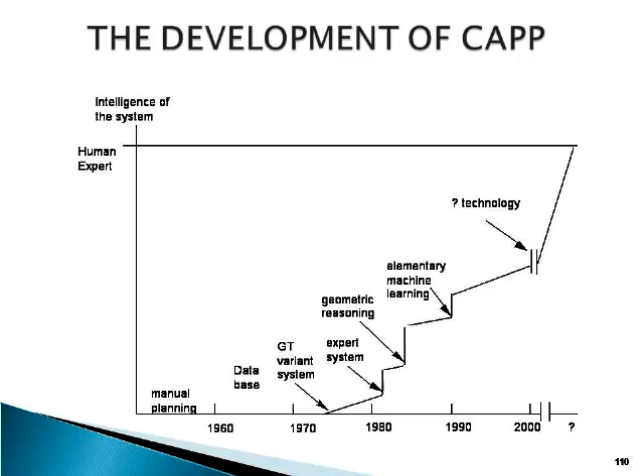Friends, with this I would like to conclude the discussion on computer-aided process planning. We have discussed computer-aided process planning limited to classwork knowledge only. I have not discussed in detail the works which are going on particularly in computer-aided process planning.

There are several works, even at NIT Warangal, we are doing particularly using STEP, databases, etc. We are developing several algorithms also - several genetic algorithms and fuzzy logic algorithms we have used to identify features, and based upon the feature selection, for process planning generation. Such kind of works have been done using decision logics and predicate logics, etc. But we have not discussed all of them here.

But friends, as a whole, we have discussed the importance of process planning, the types of process planning, and the need and importance of computer-aided process planning, and what types of process planning are available, like variant systems and generative systems. If it is a variant system, what kind of knowledge is required to develop it, and if it is a generative system, what kind of knowledge is required to develop it. We have also discussed CMPP as an example, and with this I thank you all for your patient listening to the topic, and a lot more we can discuss this elaborately also.